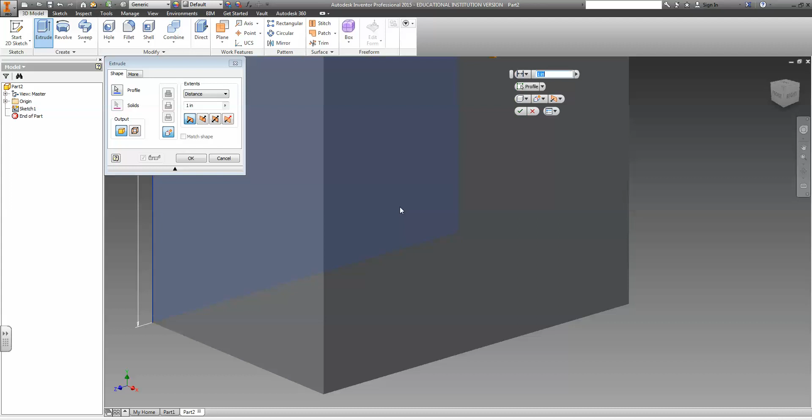So to start off, we are going to create a rectangle. We create a 2D sketch with a rectangle that is 2.5 by 1.5. Enter. And we're going to finish that sketch and extrude it to 1.5.

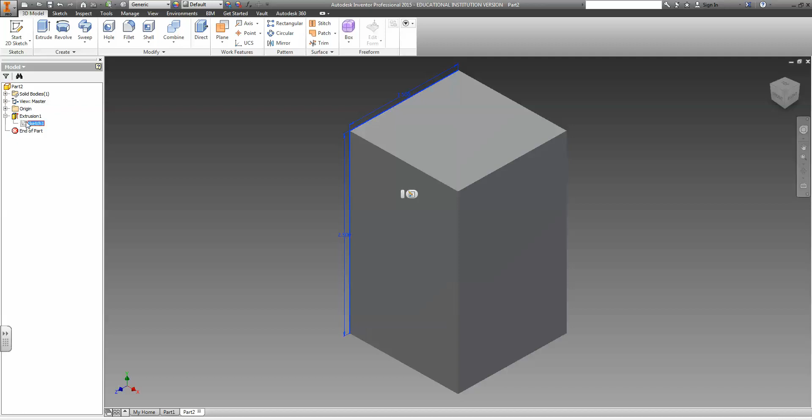Alright, and then we're going to minimize that, and it now looks like the shape on the picture, except for not quite. So I'm going to go ahead and change that to 2.5 and that to 1.5. And now it looks like the picture on the screen.

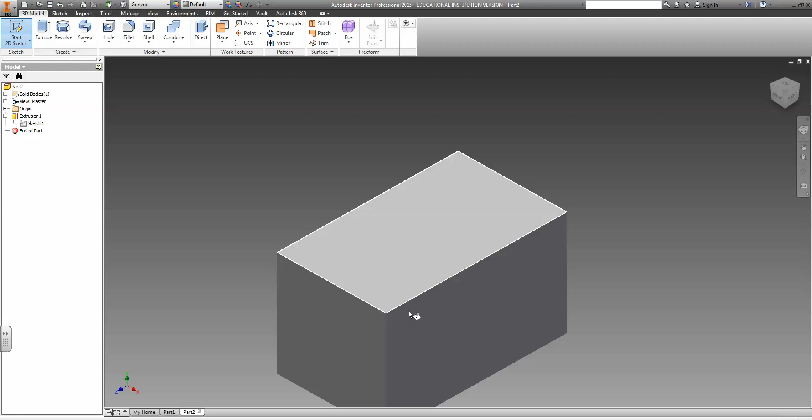Okay, so we're going to place a 2D sketch on the front. So I'm going to hit sketch and put a 2D sketch on the front right there. And we are going to want it to be... okay, so this one we're going to...

Project geometry, and then we're going to do a line and connect, connect, connect, and dimension from here to here should be 0.25.

From here to here should be 0.25. From here to here should be 0.25. And then from here to here should be 2.5 divided by 2, so that it's centered.

I actually go ahead and hit OK and delete. I could have also used the equals and made that and that the same length. Not to be confused with the parallel, even though the symbols look the same.

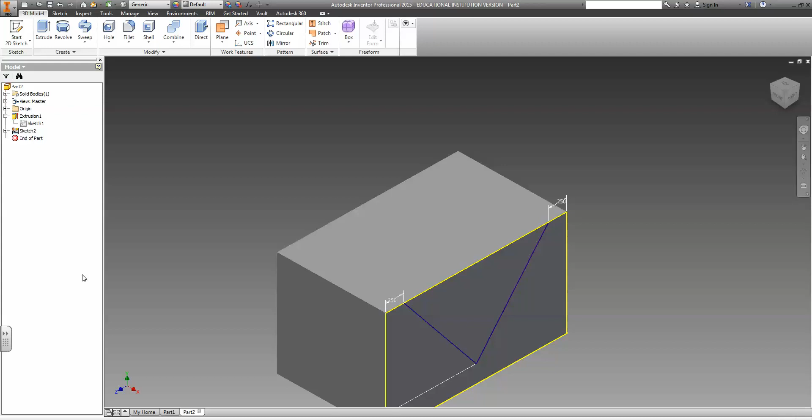Okay, because we did project geometry, this is a closed shape, so it's good. So hit finish sketch, and then we flip around to the back side and we hit start 2D sketch.

And I want to flip it that way because we need it to line up with this little guy right here.

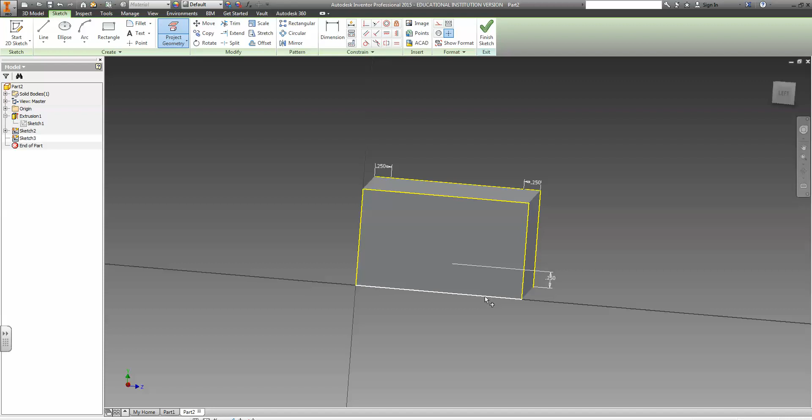And so for this one, once again I project my geometry. Okay, so once you project your geometry, we're going to draw our beautiful little triangle again. Go there, and then up there to that line.

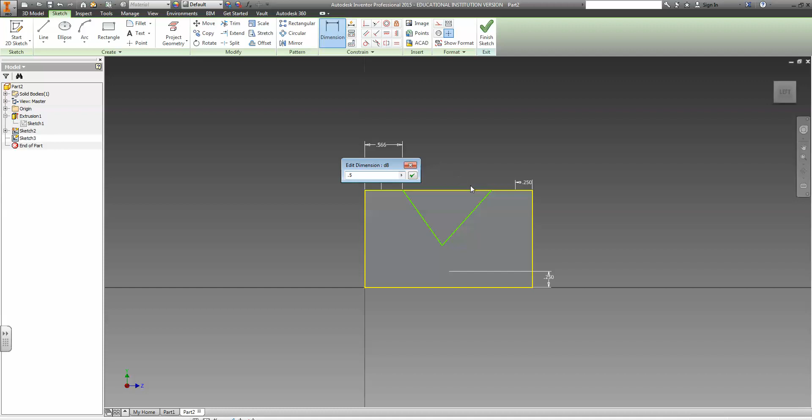And we're going to dimension from here to here is 0.5, and from here to here is 0.5, and from here to here is 0.75, and then we're going to hit equals and make this guy here and this guy here the same length, and that makes it nice and centered.

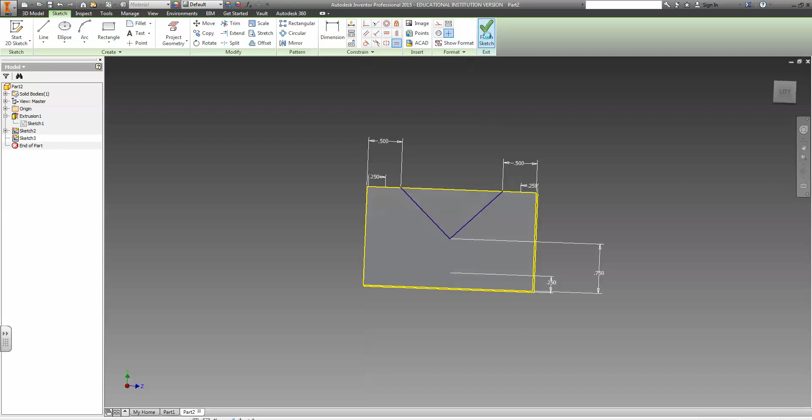And we hit finish sketch. So we have that on one side and that on the other.

Alright, next thing the directions have us do is to select loft. And so we're going to go over here and select loft, which is hiding.

We select loft, which hides from us. It's underneath the sweep feature. Actually, underneath the sweep feature are some really cool things. So we're going to go with loft.

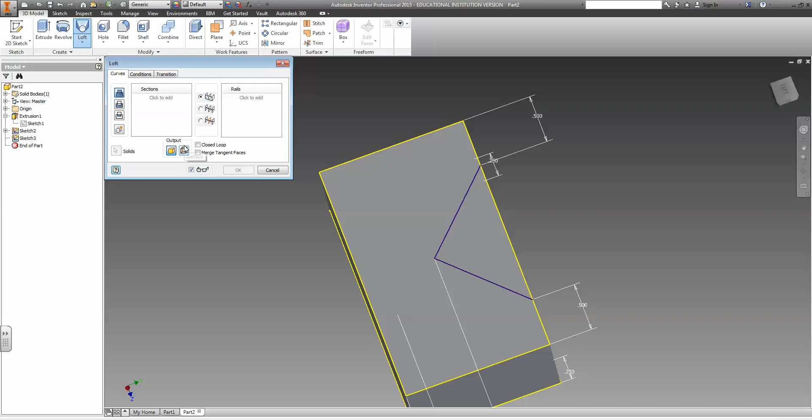All right, so basically what we're going to do is select my little triangles. And it's not working. Okay, so we select...

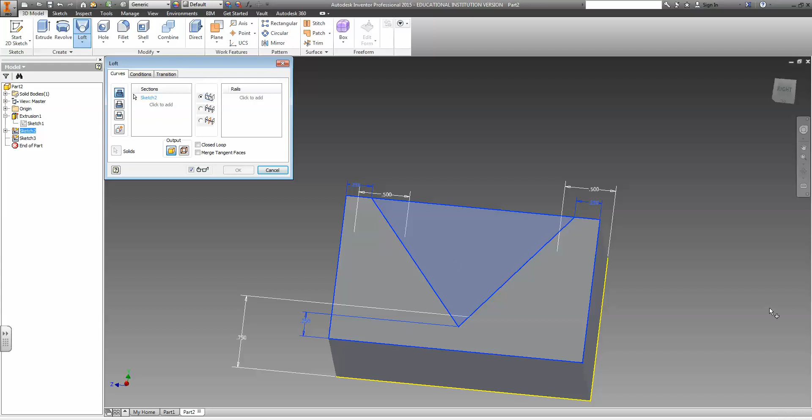Loft, and then we select the face that we want to work on, and then you select the shape you want to pick. And then you go over here and you select the face you want to work on.

Alright, the loft can be a little tricky sometimes to play with, so you may have to mess around with it a few times, but here's how you make it work.

You're basically here we're going to be doing a loft cut, so I'm going to select cut, and this is where we're going to add the sections that we want to loft.

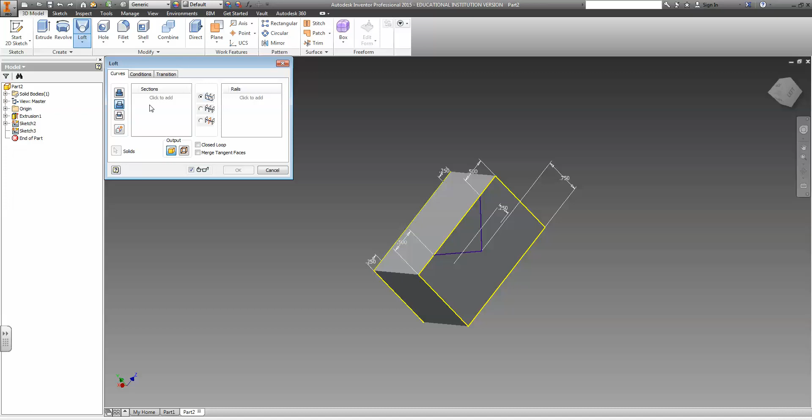So the first thing I do is select the sketch by clicking on the line of the sketch, and then I move my mouse over the triangle shape that I want to cut, and I click that. You might have to play around with it a little bit to try and get just the triangle.

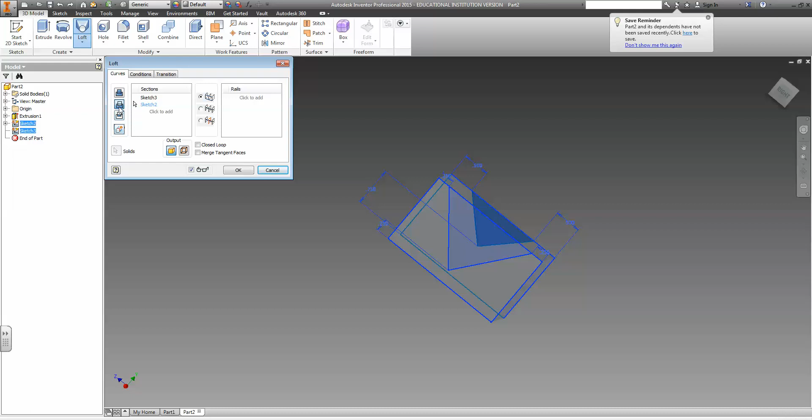I then go over here, click to add, because I want to do another sketch, and I click on this sketch here, and move into that triangle. And then I've selected cut, and I hit OK. And I have now completed the loft for this section.

Now, you may not move smoothly the first time. You do have to make sure that you keep sort of playing around and messing with it until it does work for you.